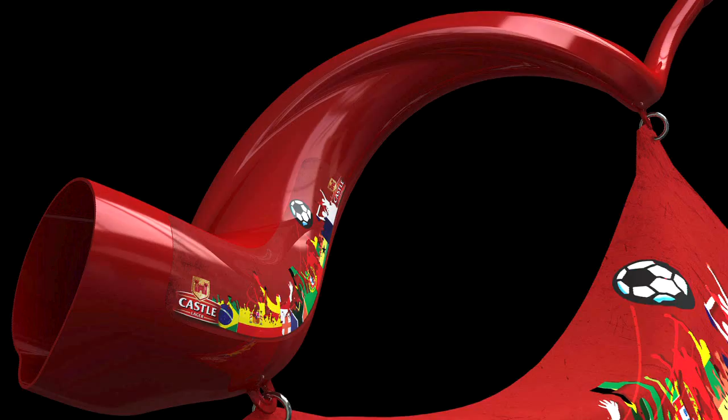Steinhobel Design is a 33-year-old purist industrial design consultancy, and our clients span the globe. We actually thrive off the almost impossible, and that's what we have a niche for: solving and raising the bar and changing the paradigms in industrial design.

Working for Brian, we get a lot of different products and projects that come through the doors every single day, and it's a great environment to be. We get a lot of challenges, and we like challenges here. We've reinvented supermarket trolleys for what they are on the planet. We've reinvented exercise machines for what they are on the planet. And that is the bottom line of what good software allows you to do.

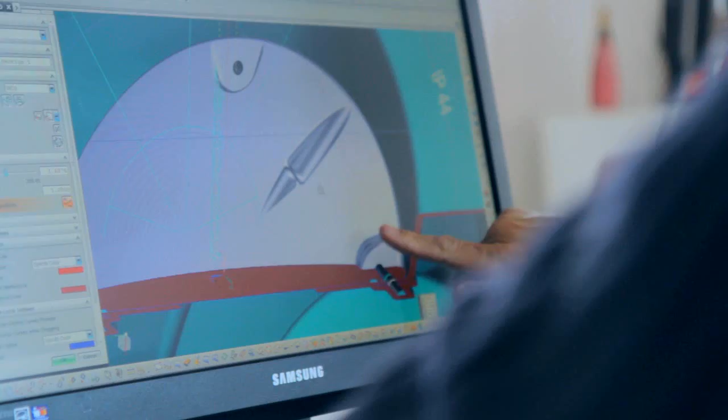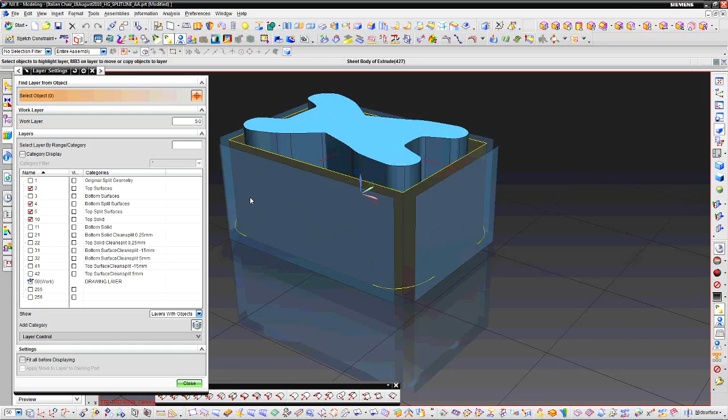As a business, Steinhobel uses NX because it's the only comprehensive software for the entire process of industrial design from beginning to end. NX allows us to express ourselves artistically when we design products. The amount of freedom you get from the sketching, not just in a 2D environment but in a 3D environment, is very, very powerful for quickly deriving a shape and then running surfaces on those curves to see the 3D model, and then using the face analysis to make sure that those surfaces are class A.

One of the great advantages of using NX is that it's so vividly convincing, and it's so quick to get to each iteration that it just quells arguments and subjective debate. We don't even have to show our clients sketches anymore. We go straight to models. We don't show clients sketches, we show them what we call the first build. And we build it with such confidence, sometimes we hardly change that first build.

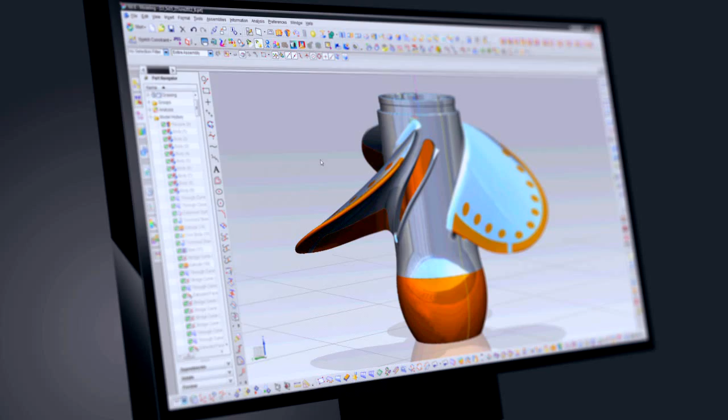Synchronous modeling opens up 3D modeling so much. We were very, very structured in the old days using old software, where you had to basically run a history on your part that was almost channeling you down one avenue in your 3D model, whereas synchronous modeling just allows you to do anything to that model.

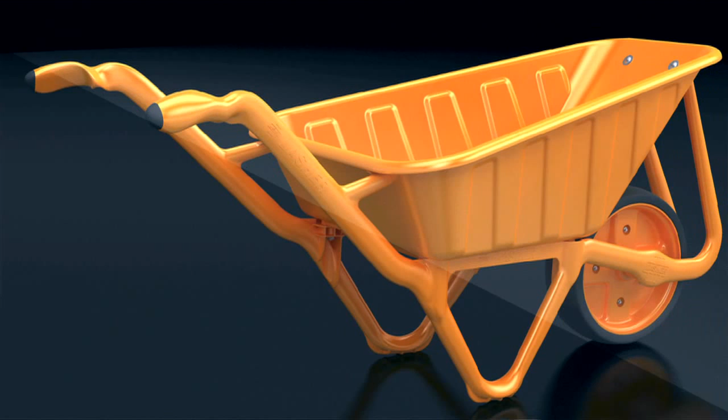The process of the CAD in cyberspace interfaced with physical reality has to be bridged, and that's where we find NX has become so easy to use on that score, outputting the files into rapid prototypes, and then further down the line refining those, and then into machining the tools. The objective is to get a product in your hands at the end result. You have to hold something that's previously been just a concept in your head.

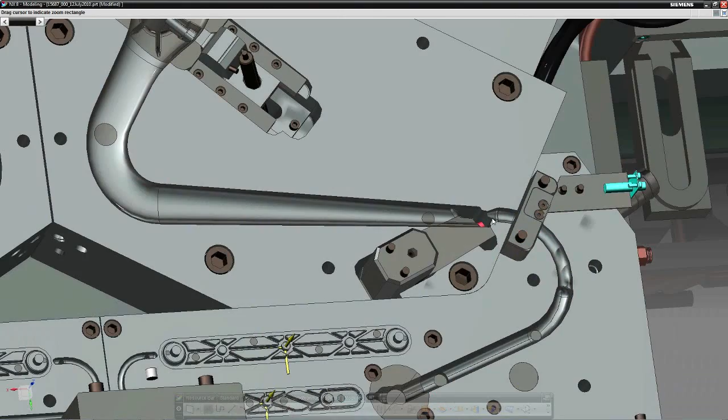From a product viability approach, NX allows us to make sure before we send it to tooling that it's toolable. We can check all the draft angles, make sure there's no undercuts, and if there are undercuts, we've got enough space to run slides or cores.

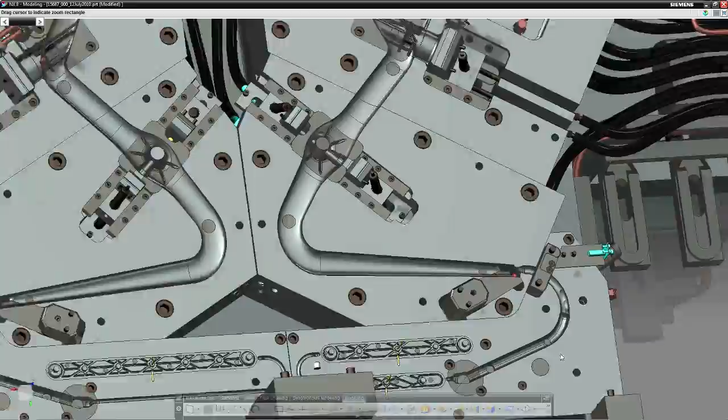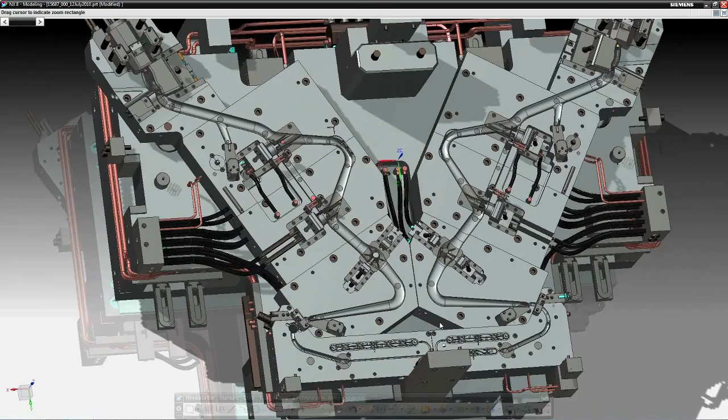I've found that a lot of the tool makers are quite happy with the files that they get from NX. If there is a change that they need, we can quite easily do it on the NX side and then just resend them the step file or the IGES file. It gives us a few less grey hairs than we used to have in the old days when we sent off design drawings to a tool maker. With NX, we know we're sending a good quality product to the tool maker and it's going to be toolable. It's almost like investing in an insurance policy to have decent CAD like NX, because without it you are open to a lot of potential disasters in this very expensive phase of tooling.

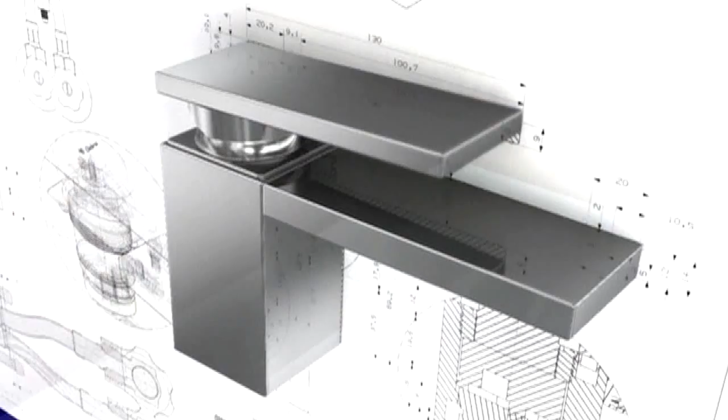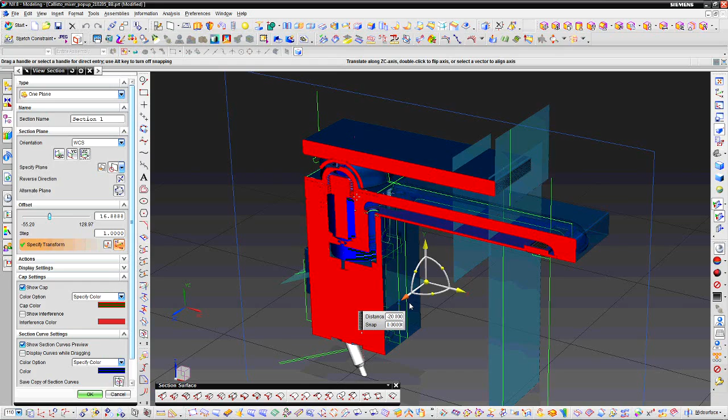The collaboration is really highlighted with the company Cobra, where we do all sorts of designer taps. We're looking after our part of the ship, doing what we're good at, and interfacing with them through a collaborative effort with the common thread of the NX software to achieve world-class competitive taps. We had the original internals from Cobra, and then we basically took our shapes and worked them around that. So we kept the volumes, the whole working mechanism exactly the same as what they required in their manufacturing process, and NX allowed us to do some really fancy shapes around those taps.

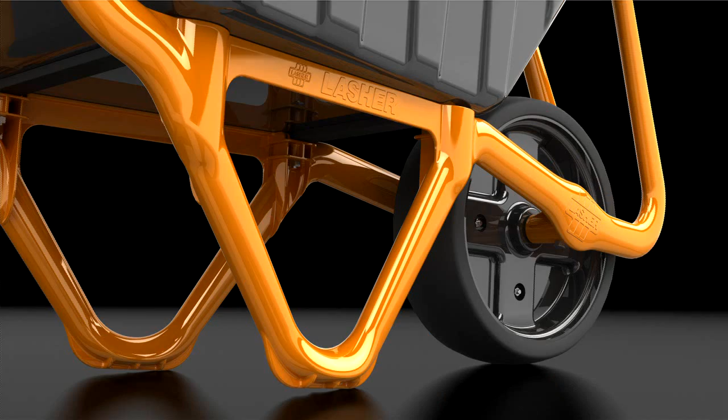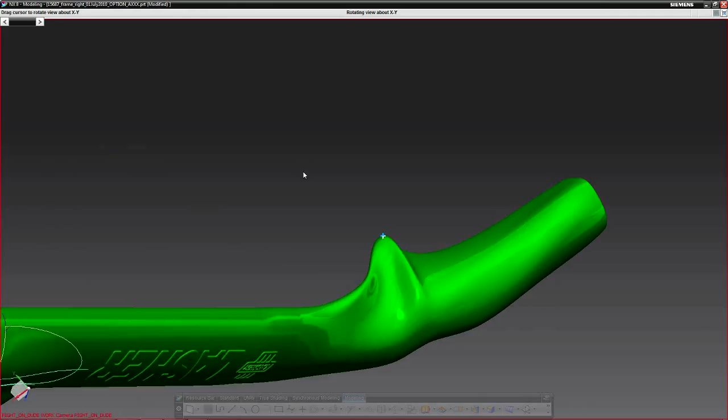There were critical elements that used to say that the CAD or the computers would take the art out of the design, and it's done just the opposite. With the capability that we have within the NX package, we can achieve these extreme forms which would be absolutely unthinkable in previous years. This hand grip of this wheelbarrow chassis is a perfect example of how NX can actually achieve these shapes that we want to achieve to help with safety and comfort issues, bearing in mind that a wheelbarrow for some people is their daily tool for most of their working life.

So if we can make the wheelbarrow lighter, stronger, more comfortable through a design process, that's fantastic.

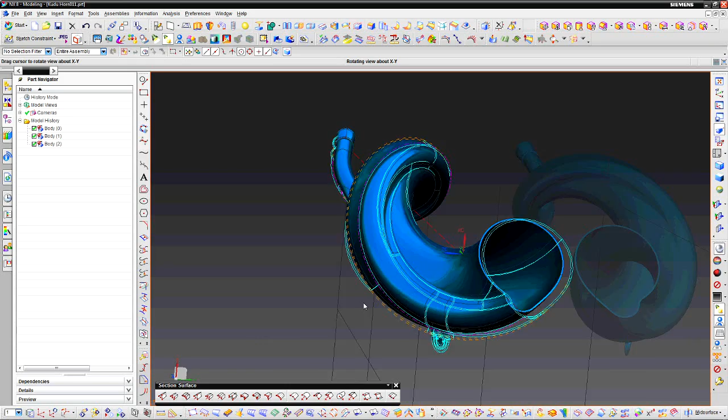With the World Cup, which was held in South Africa a few years ago, we were involved in a number of products, this being one of them, the Kudu Vuvuzela, which had a very short lead time. With the software, we could get the parting lines for the tool and the tool executed and the whole product developed in a ridiculously short space of time.

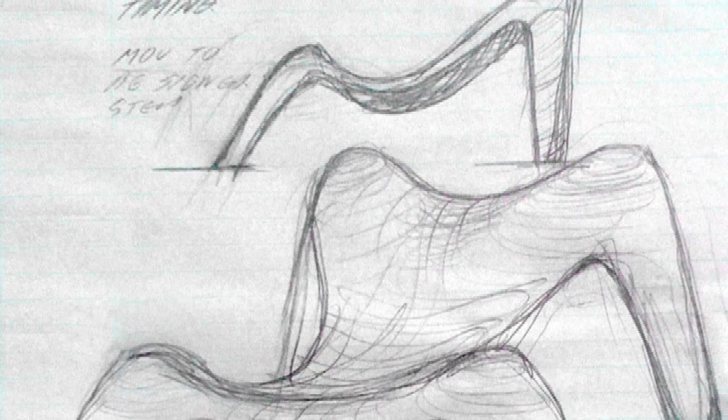This is the example of NX at its best, I would say, where with one CAD build and one little prototype, we achieved the extreme result of having the perfect product in our eyes. It's really what we say is squeezing the maximum potential out of the product, which is very important. We don't want the product to be able to be improved on once it's there. So we got to maximum potential in 3 easy steps, in a matter of days rather than weeks and months.

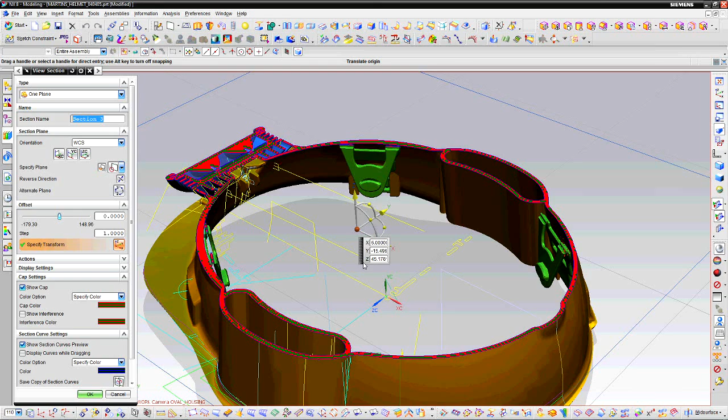I've been on NX now for over 15 years, and it's instilled a lot of confidence in my approach to design. Design is actually an intellectual process initially. You have to think about something and visualize it. Now, that visualization, just as racing drivers visualize the track before they do a lap, is as important in design.

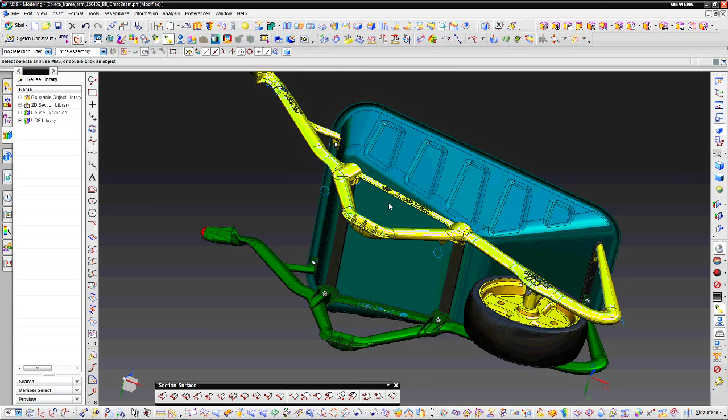They have their very capable vehicle to get them around that visualization. We have the vehicle of NX CAD, where we can jump into the car, complete the race and win every time. The ongoing refinements and improvements that you get coming out of NX on a yearly basis, we surf the crest of that technology and capitalize on it by incorporating it into our latest designs. Therefore, we have a magnificent progressive approach to the design work where we're actually giving the competitive advantage to all our clients on a consistent basis through that partnership with STEC and NX.